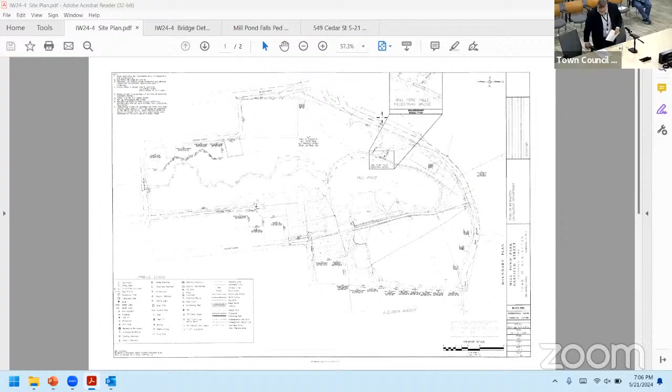This application is that the town intends to replace the pedestrian bridge at Mill Pond Park over the Mill Pond Falls for material deficiencies. This map demonstrates the area where the bridge is at the pond. This is the grand map of the park, and it's the specific area where the bridge is.

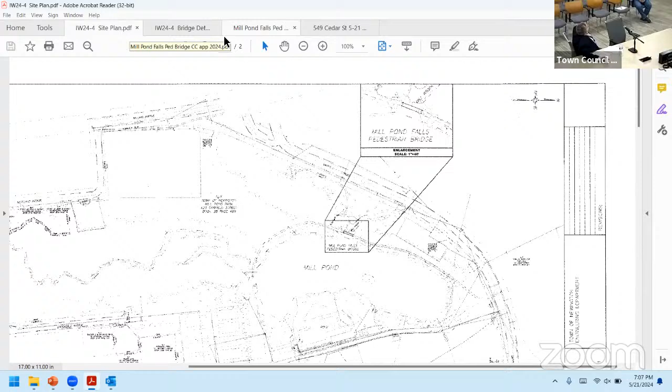So the new bridge is very similar to the old one. Eric, could you bring up the profile? That one. So this is just for your information, showing what the new bridge will look like. It's very similar to the one that's out there. It's not 100% match, but it's very close.

Is it sitting on the same pier, the same column? That is my intent. Okay, that will be determined by when we remove the old one. I was going to get to that later, took it out of order. Sorry about that. I'm just going to ask the commissioners to hold their questions until after the presentation.

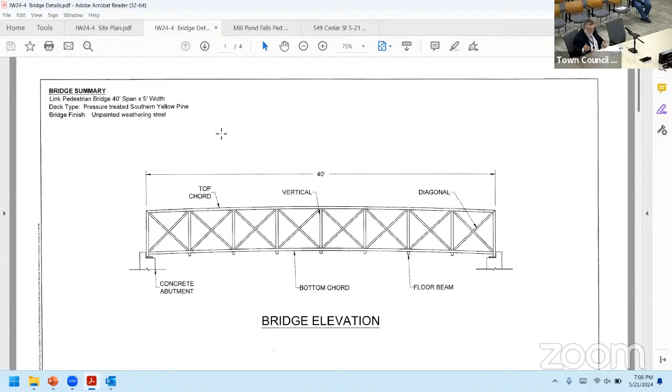So that's what it's going to look like. We do have some more detailed plans of that. They're in the packet, but we won't speak to those. So bring up the detailed site plan, Eric. That one. So what we see here...

In order to accommodate this work, we need to bring in a crane so the scope of the work, primarily, is to lift the old bridge up. When we do that, we'll evaluate the existing components for their material integrity, and if they're found sound enough, we'll reutilize those. We will have to replace the anchor bolts, because the ones there are not the same spacing as the bridge that's going to be put there, so they'll be drilled and glued, and then the new bridge will be set on top of it.

Again, if we have to make improvements or replace the abutments, we'd have to bring this to your attention, because that would be work very close to the actual water.

As we are now, if you look at the graphic here, we have a proposed crane pad area. I used the 100-foot radius for that because that's a fairly small crane, pretty much the smallest we could bring in for this. If it ends up being a larger crane, it may not be in exactly that spot, but it will be in this general area.

This has to do with the idiosyncrasies of using a crane to lift something that weighs 10,000 pounds. To accommodate the swing for the crane, the dashed line is our limit of potential disturbance and clearing limits; we don't intend to do work in the entire area. What we do intend is to clear the shrubbery and trees from the embankment on both sides of the bridge, which is the primary work area.

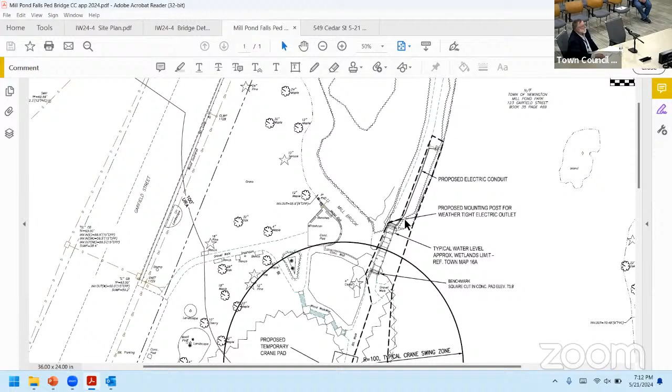We think there's still power active to these poles. We intend to add a conduit alongside the walk down to the bridge to provide power for the winter display, because the way we power that display now is questionable.

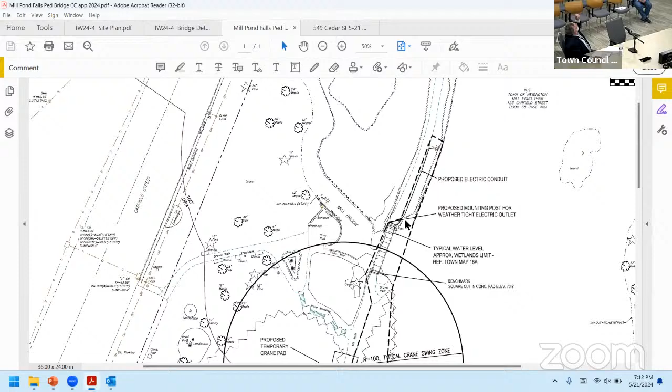So to summarize, what we're doing is clearing the brush along the embankment for the pond to allow for the crane's work, and to add a conduit in a trench, which will not change the volume in the upland review area to any extent.

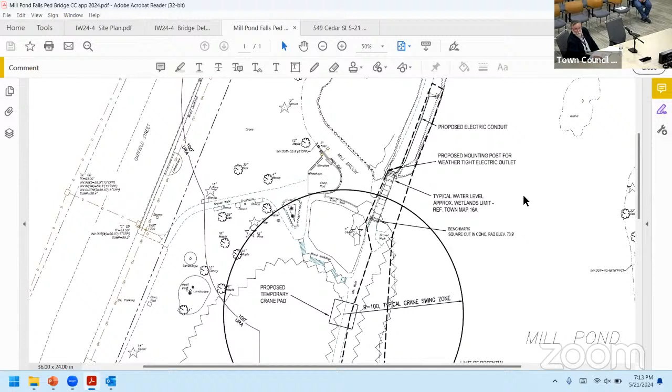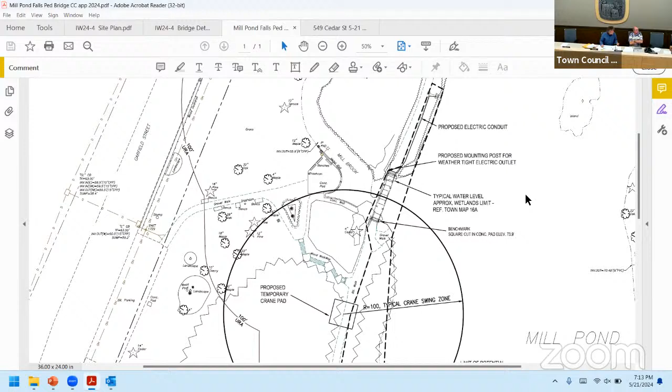And do we have questions from the commission? Commissioner Bashan: I was just - I don't know if it's wetland related so much, but it kind of is - how are you going to bring the crane in across the field, the soccer field?

There's an area where the fence ends. We will remove one section of fence and roll it back, take one post out, and bring the crane in from Garfield. We'll either crib it or use any method the contractor chooses, because that area is soft in there - Steve will tell you from experience.

I mean, we can hope that in October. It's still in the review area, I guess, but I'm not too concerned about it.

Yeah, but the bridge is only 5 tons? Ten. Oh, I thought you said 10,000. Ten thousand pounds, yes - 5 tons. I mean, a loader couldn't lift it up and just take it away? Not according to the people I consulted with. Okay, that's just my curiosity.

Okay, Alan. Expanding on Commissioner Bashan's curiosity, I called the Parks and Recreation Department and came in person a few months ago regarding a board in there that was not of integrity - there was only one board. I ride my bicycle and walk there, and they said they were going to take care of it. Well, that was 6 months ago. So now my question is, we're working into a significant change of the whole bridge.

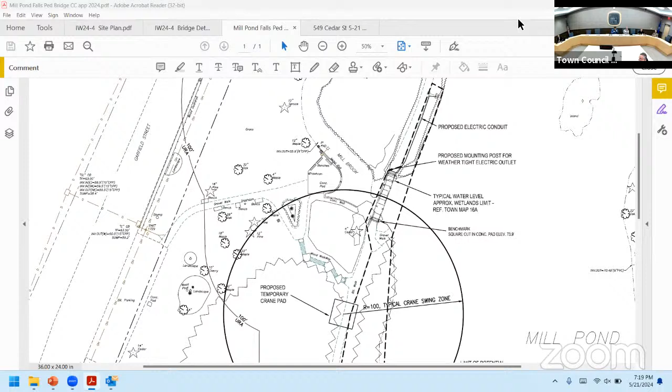Steve, would you like to come up here and join me? My name is Steve Tufelt, I'm with the Parks and Rec Department. I'm not the town arborist, but I am a licensed arborist for the state of Connecticut. We currently have no planting plan to replace anything there.

So we're looking for what you guys would like to put back in there to remedy what's there. Currently it's 90% invasives growing on the existing trees, choking them out. If you've walked around there, if you're residents, you've seen us doing normal maintenance with our forestry cutter reaching down the embankment during the winter and cutting stuff back.

We've had really good success maintaining what's there and keeping it open. But is there any way to have a planting plan, since those invasives are going to reappear, right? They're very consistent in coming back. That would be covered under our normal maintenance, from everyday weekly mowing to the bank mowing we currently do. So you are going to have grass back in there, which is what I think we want to see. Again, that's up to you guys, what you would like us to put back in.

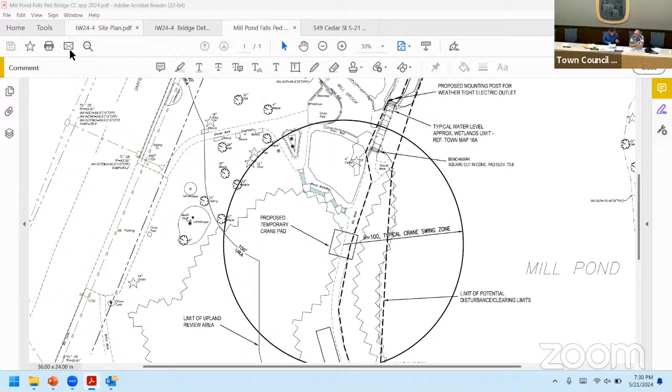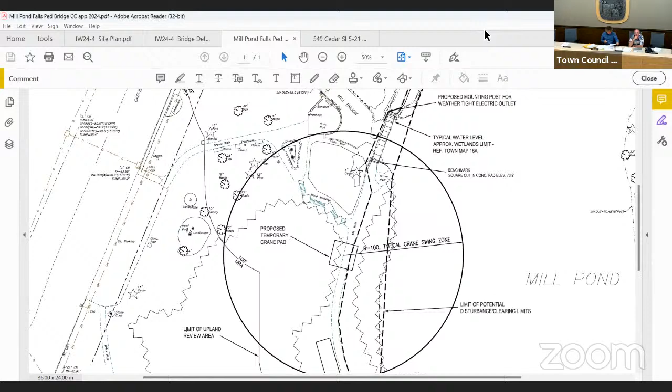Under new business, we have application IW 24-5 for the installation of on-site monitoring wells and limited brush clearing within the upland review area at 549 Cedar Street, applicant Textron Incorporated, owner SKRG Realty, contact Greg Simpson. Good evening, you can just state your name and address for the record.

Yes, hello commissioners, thank you. My name is Daniel Saramet, 12 Cedar Ridge Drive, Hebron, Connecticut. I'm here on behalf of Textron and Greg Simpson, the former property owner who is responsible for the environmental investigation and cleanup of the site.

Historically, this property was used for industrial manufacturing purposes. We've been working on the investigation and environmental remediation of the site over the last 15 to 20 years, many phases of investigation of soil, groundwater, and groundwater within bedrock. We've also completed various phases of soil remediation and have started groundwater remediation, which I'll talk about a little bit later.

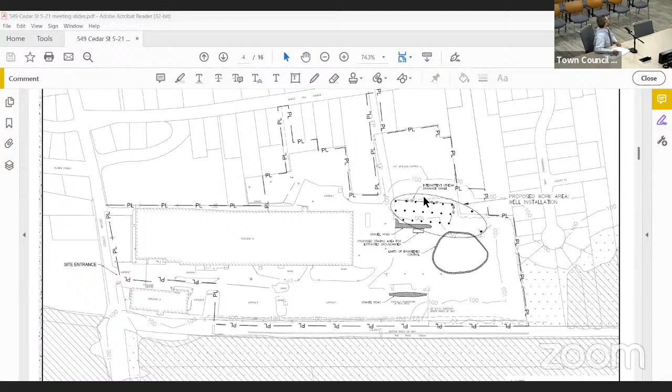This is a site plan. You can see the area of the proposed work toward the southern portion of the site in the undeveloped area. A portion of the work is within the 100-foot upland review area of an intermittent stream, kind of a stormwater swale, stormwater conveyance. I think the next slide zooms in a little bit more.

You can see that intermittent swale and the dashed double line. Our proposed work, the blue dots, are the wells we're seeking to install. Most are in a grid just off of the asphalt on the left side of the figure. Then there's two wells kind of separate, south of where we've done work previously.

So our previous work was focused around all those black dots, where we've done 2 phases of pilot tests of the work we're proposing. There has been other soil remediation done on the site, some soil consolidation, a lot of soil excavated and removed from the site to the area west of where we're working now.

Just as a point of interest, this commission approved this engineered control a few years ago. They constructed it.

Just some photos of the area. This is the area where we did some of the previous work in. In 2012, 13, we did soil remediation in this area. We dug out contaminated soil, replaced it with clean soil, restored it. That was across that wetland stream.

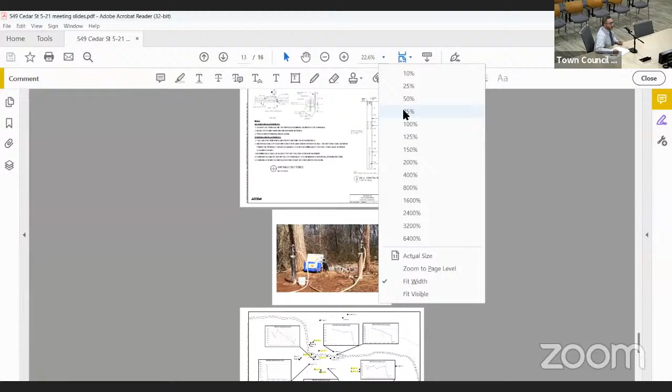This is just part of the application, it's in your application package as well. Just a well construction diagram. Just wanted to highlight that all our underground work is 15, 20, up to 50 or 60 feet below ground. So we don't anticipate any superficial excavation, filling, or regrading. All the work is really done underground except access for the drill rig.

These are 2 of the injection wells used during the previous phase. Just to kind of describe the injection part of the process, after the wells are installed, they're connected to a mixed tank and a pump to inject. It's emulsified vegetable oil, so it's kind of like diluted soy milk.

And we would use mixers and pumps to inject that into the wells under low pressure. That solution would enter the groundwater and cause a series of microbiological reactions that would result in the decrease of our volatile organic contaminant concentration. It's primarily volatile organics like perchloroethylene, trichloroethylene that are the contaminant here that we're trying to clean up.

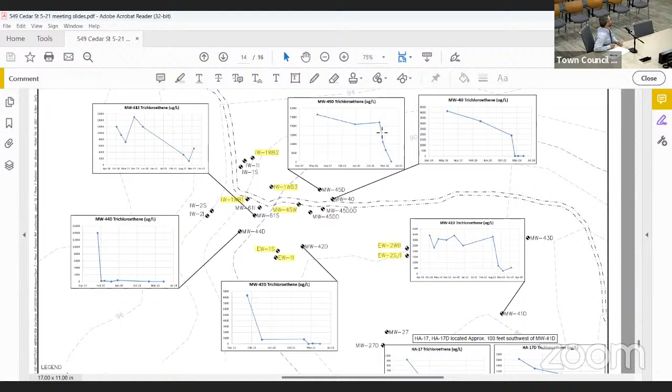You can see even further down gradient, that decrease in concentration. So we did the pilot test to show that the biochemistry worked and that we could get distribution in the groundwater and bedrock.

And now that we're more confident, we'd like to move ahead toward treatment of that larger area with more wells. These are just the photos in your application packet, showing that area and the type of vegetation that's there.

I guess the only other thing I'll add is that if the drill rig does disturb any of the ground surface, we would seed that as soon as possible after.

We're looking to start this work in June, hopefully, and do the injections late summer, early fall. And then we would be in a monitoring period for at least 2 years.

We'd go out either every 3 months or every 6 months to monitor these wells to gauge the performance of what we're doing. There is a potential to do future remediation with these same wells in the future, largely dependent on the results that we see over the following 2 years.

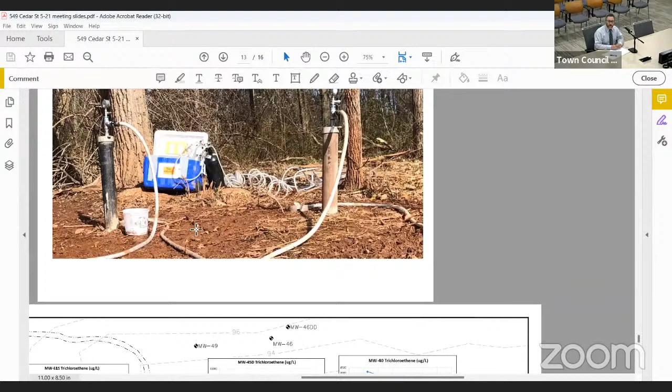There was likely equipment not being used, equipment that was stored in those areas that released that material. You're talking about the TCE or the trichloroethylene? Yeah, TCE, PCE. Oftentimes it was just blatantly dumped.

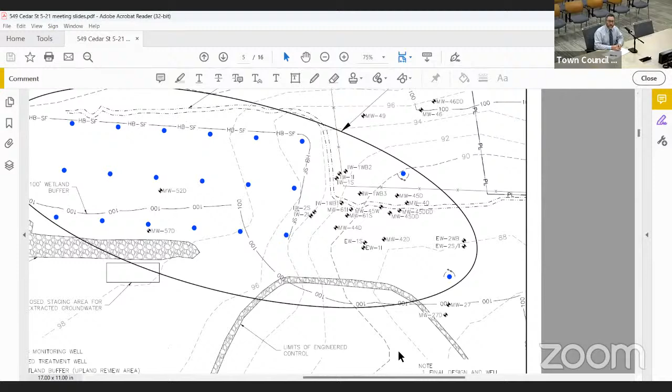Yeah, we don't know about that. We know from aerial photographs that there was equipment storage in that area.

And how deep is the groundwater? If the wells are going down as much as 50 feet, you'll be well into it, the static groundwater at that time? Yeah, the groundwater varies from 7 to 15 feet or so below the ground surface.

And the bedrock starts around 15 feet, and that's the target area for the injection work. So unlike petroleum products, these volatiles go below the water. They don't float. Correct. Okay.

Yeah, these particular things are denser than water, so they've sunk down into the water, into the bedrock, primarily in the fractures in the bedrock, and that's where we're targeting.

And the injection process goes on - you said something about you're going to monitor it 2 years out, but will that injection process be going on through that whole time, or is it just until the fall?

No, yeah, we anticipate this initial round, maybe 5 or 6 weeks. That's it. We plan to inject around 65,000 gallons of solution over a 5 to 6 week period. And then we would monitor for a year, 2 years.

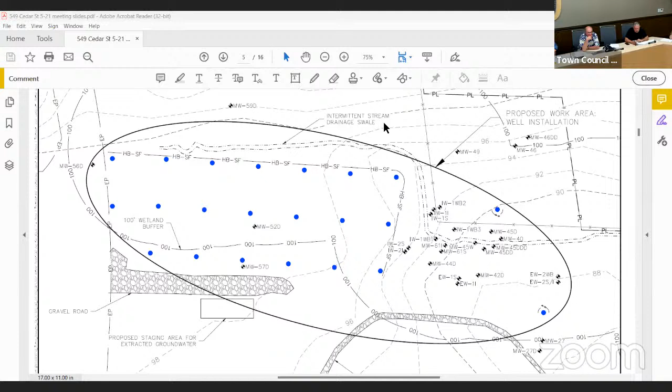I get the two mixed up. Is this a GB or a GA designated groundwater? This is a GB designated groundwater area. Is industrial, which is most of Newington, correct?

I'm not sure, but this area, down by the train tracks and the wetland areas, it is more of an industrial area. In other words, you wouldn't want to have a drinking water well in a GB groundwater area. Right. And is there any acceptable level for volatiles, parts per million or?

Yeah, because it is a GB area, not a GA area. Yeah, we have a 10 times higher threshold, is that what it is? GA is like a cleaner standard. That would be the higher threshold.

Yeah, where you would have to clean up to non-detect or background concentration levels, but the historic use in this area, the fact that people don't rely on the groundwater for drinking water - this is a GB area, so there are still regulations that have to be met for the cleanup and certain numbers protective of human and environmental health, but it's not the drinking water standards.

Commissioner Sadil has his hand raised online. Commissioner Sadil. Thank you, few questions.

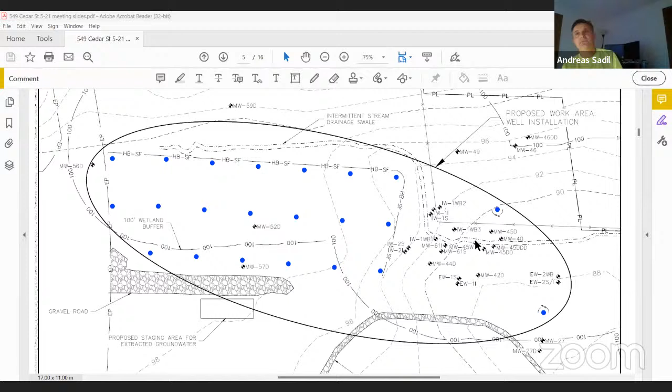There is, out of all those black dots, a variety, a range of concentrations. Some of the wells in the vicinity of where we've injected previously have gotten down to low or non-detect concentrations, which is very promising. Some of those black dots on that figure, like I said, there is a range. Some of them are in areas that haven't been treated yet, or require additional treatment.

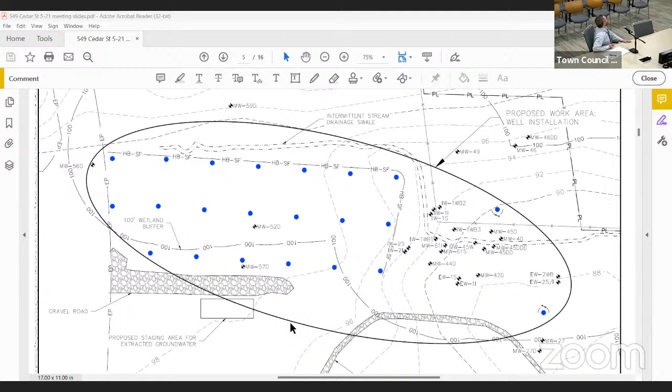Part of the reason why we're putting those additional 2 blue dots toward the right-hand side of the figure is to treat additional areas. But yeah, overall, the results have shown positive effect and pretty promising.

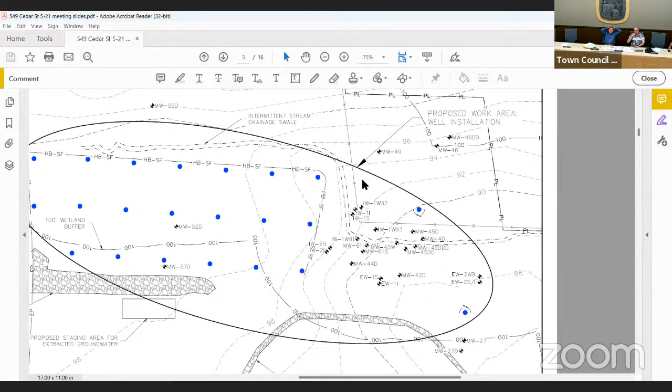Could you do me a favor and go to, I think you had a photograph in here of the monitoring wells? I just wanted to show the commission again what those are. Because commissioners, you will see these around town in different locations, different sites that are contaminated.

One that comes to mind is the Fafnir property off of Willard Ave. In the woods, typically off-site, you'll see these. Basically, it's a pipe coming out of the ground with a cap on it. Yeah, there's usually a steel stick-up with a lockable cap, and inside that there's usually a 2-inch PVC riser that is the well.

So the ones with the steel stick-ups are more for longer term monitoring wells. For the injection work, where it's expected to be shorter term work, we might just leave the PVC, which makes it easier to connect onto with the wellheads. And since they're not as long term, there's none in this photo, but there's also, like in paved areas like asphalt, those road boxes.

The monitoring wells have a triangle on them usually. Yeah. Or at Home Depot, you might see it where there was a former factory there - you'll see them in the floor of Home Depot. Even gas stations. Yeah, you see there's a few in the parking lot behind the old Dunkin' Donuts in the center of town, because the garage that was back there in the dry cleaning.

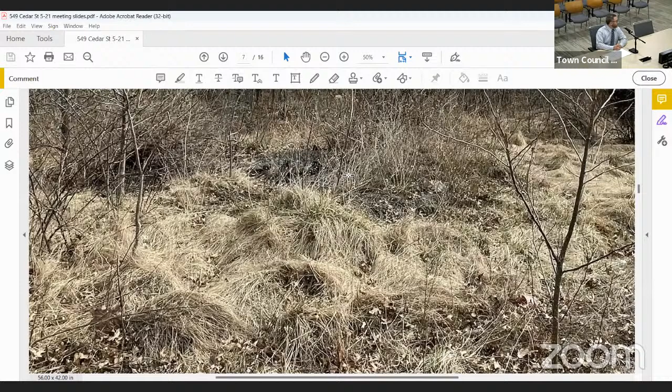Any other questions from commissioners? All right, seeing none, motion to table. I'd like to make a motion to table this until the next meeting.

Thank you, Commissioner Ouimet. I think they were anticipating working in June, so I don't believe we can take action to approve this evening, not unless you want to make a motion that the agent can do an agent approval. That would be up to you, and I could go through the process that way if you guys are satisfied. I'll ask the commission, is the commission comfortable with having Eric handle this as agent approval after what you've heard this evening?

Commissioner Pastor, yes, I agree, agent approval. Okay, other commissioners' comments?

I kind of prefer, as you said yourself, that we had heard this application. I was just thinking we didn't have to approve it tonight, but at least clear it, so the very next meeting we would have been able to clear it, but if they want to start in June it'd be the second or third. Right, if we allow Eric, he can move this along even quicker. I guess since we've already heard it, I'll go along with it. I was completely comfortable with having Eric do this originally, but I did want everyone here for educational purposes to hear this. I appreciate it, I agree.